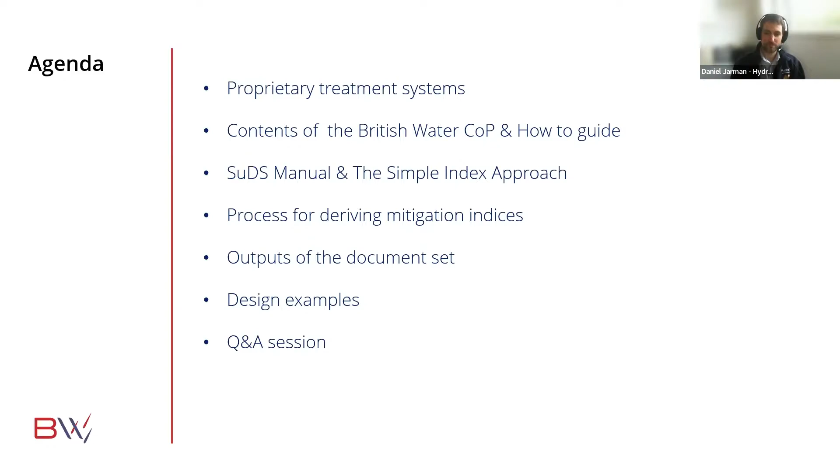Proprietary treatment systems were originally heavily categorized as anything subsurface or piped. But there are more hybrid and surface-based systems now that blur the line between subsurface and surface zones. Typically surface systems are favored, but subsurface systems can be preferable where they meet additional design constraints related to health, safety, or space, and allow developments to meet other SuDS design objectives such as amenity, biodiversity, and quantity control.

Those processes include screening out larger debris, settling out dense particulate material, flotation of free phase oils or trash, filtration of smaller or more neutrally buoyant particles, sorption of dissolved pollutants like heavy metals or nutrients, and for some of the more surface-based systems, bioremediation and biotransformation, where microorganisms or biological processes lock up pollutants or transform them into a more stable form with less damaging long-term impact.

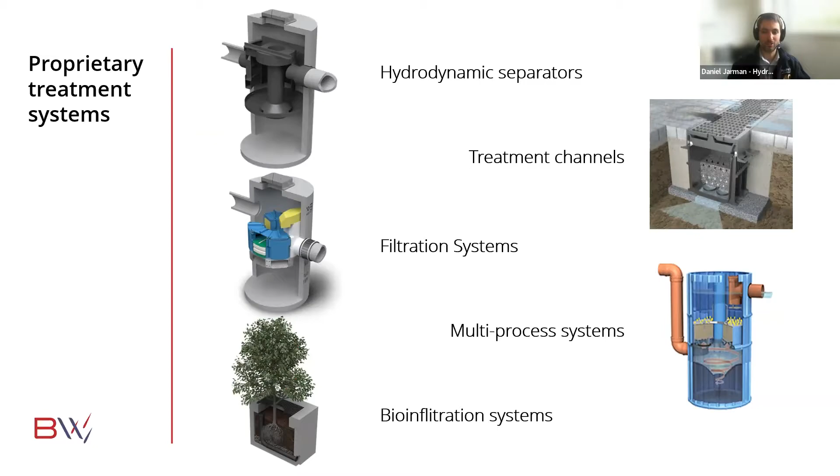The main issue we're addressing with both documents is arriving at a full set of pollution mitigation indices for use in the simple index approach. We'll get into more detail as we go through the slide set.

The first document, the COP, is a voluntary lab test protocol to generate supporting data for deriving mitigation indices for proprietary treatment devices. The tests in that code of practice are based on elements of the US New Jersey Department of Environmental Protection and German DIBT test protocols, but adapted to make them relevant to UK conditions.

We started with the DIBT and NJDEP test protocols because they're well recognized, already scientifically justified, and there are already devices in the UK or marketed in the UK with these approvals. So we had to recognize these protocols are already present, but also needed to adapt them to make them robust for the UK.

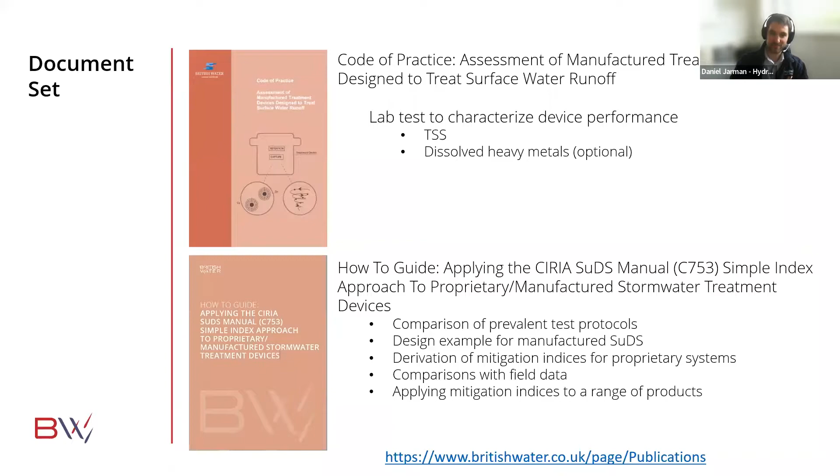So I would hope everyone is aware of what the SuDS manual is. I'm sure they are, but for those of you wondering what mitigation indices are and why you should care, we'll do a quick skip through the SuDS manual and the SIA, or the simple index approach, design process.

The SuDS manual is a very comprehensive guidance document published by CIRIA. The underpinning philosophy is that there are four main pillars which are pivotal to the design of any SuDS scheme: water quantity, water quality, amenity, and biodiversity. The SuDS manual contains many answers and has good supporting information where available, and although it's a guidance document, many of the design processes have been adopted into local planning requirements, so you're seeing this guidance become mandatory.

The only downside is it's a bit of a doorstop of a document, 1,000 pages long, so we are going to restrict our focus right down to design principles for water quality today, and then down again just to the simple index approach.

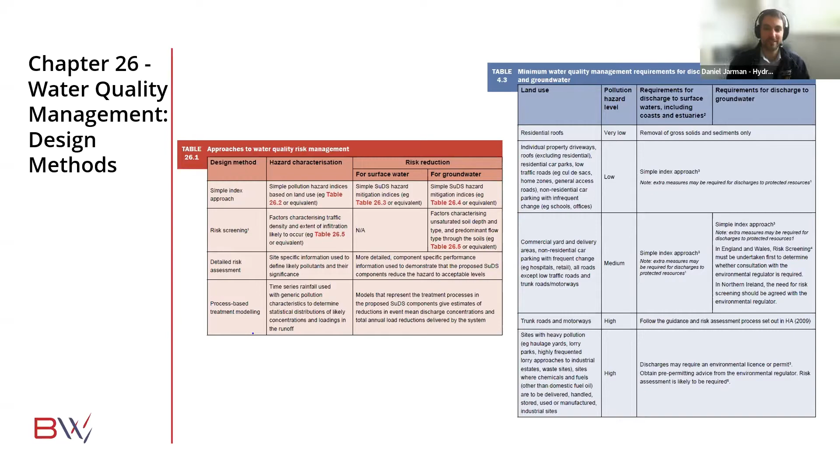The SIA design process is a source pathway receptor approach. It quantifies the hazard a particular site or source presents, and requires that the pollutant pathway present mechanisms to get your hazard level down to an acceptable level before it reaches the receiving water body, which is the receptor.

Now, in the SIA process, 3 pollutants are essentially analyzed, which are TSS, heavy metals, and hydrocarbons. A value named the pollutant mitigation index is used to select SuDS components that reduce hazards to an acceptable level.

So I've run through a quick example of this. Step 1 is to allocate... sorry, I'm aware there's text coming up. We'll come to the questions at the end.

Step 1 is to allocate a suitable pollution hazard index for the proposed land use. If we take, say, a typical residential development, which is considered low risk, you get pollution hazard indices of 0.5, 0.4, and 0.4 for TSS, metals, and hydrocarbons, respectively.

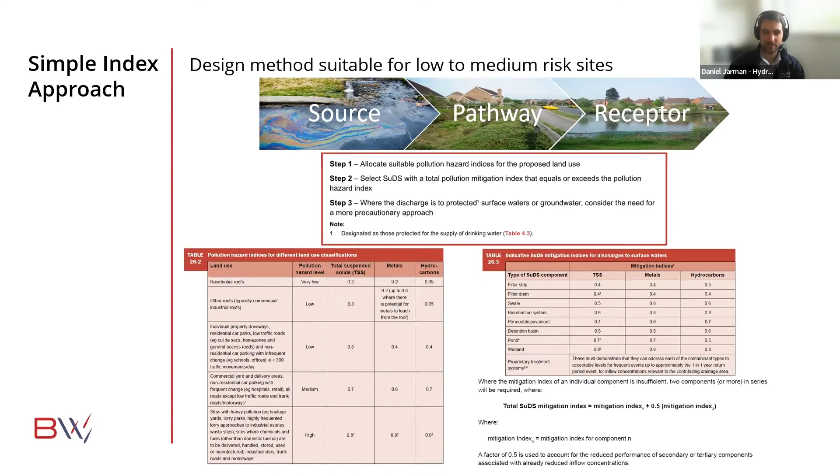I'll quickly just touch on where those mitigation indices for the green or natural systems come from, because it's relevant to understanding what we're trying to achieve for the proprietary systems.

So the mitigation indices are an indicator of average annual load reduction of a particular pollutant. They've been derived from a project called the US BMP database, or the Best Management Practice database, and that's recently been retitled the International Stormwater BMP database. This project monitored over 700 different sites throughout the US to establish the efficiency of different SuDS components.

A summary of the findings is presented in table 26.13 in the SuDS manual, which is kind of hidden away in an appendix. But we don't need to go into this in too much detail, but I'll quickly give an example of how it maps over to the mitigation indices.

So if you take a detention basin as an example from the BMP database, you've got an interquartile range for TSS at the inlet and outlet of, well, at the inlet it's 20 to 114 milligrams a litre, and at the outlet it's 10 to 47 milligrams a litre. So you're getting around about a 50% reduction in the pollutant load, and you see that reflected in the mitigation index, which is 0.5. So I hope that gives a bit of traceability to where those numbers come from.

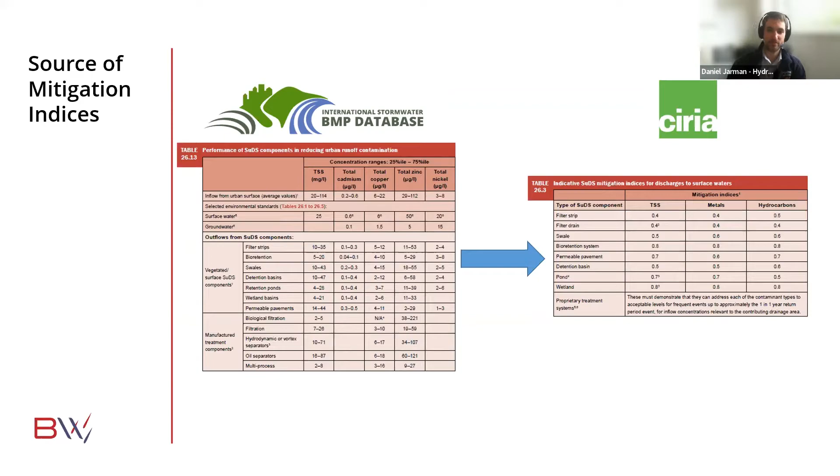And jumping to take a more detailed look at that requirement, at the end of table 26.3, it lays out the requirements for proprietary treatment systems, which is they must demonstrate they can address each of the contaminant types to acceptable levels for frequent events up to approximately the 1 in 1 year return period event for inflow concentrations relevant to the contributing drainage area, which is a bit of a mouthful, but what it's essentially putting the responsibility on the manufacturers for is to quantify and demonstrate the annual pollutant inflow and removal rates for TSS, heavy metals, and hydrocarbons, and that's under treatment flow rates up to the 1 in 1 year event.

Now, broadly speaking, this gives mitigation indices that are equivalent to those presented and derived from the US BMP database. The British Water Group has been working towards a standardized and robust approach for the testing and derivation of mitigation indices that is in accordance with this requirement of the SuDS manual. And this is what we've arrived at with the COP and how-to guide.

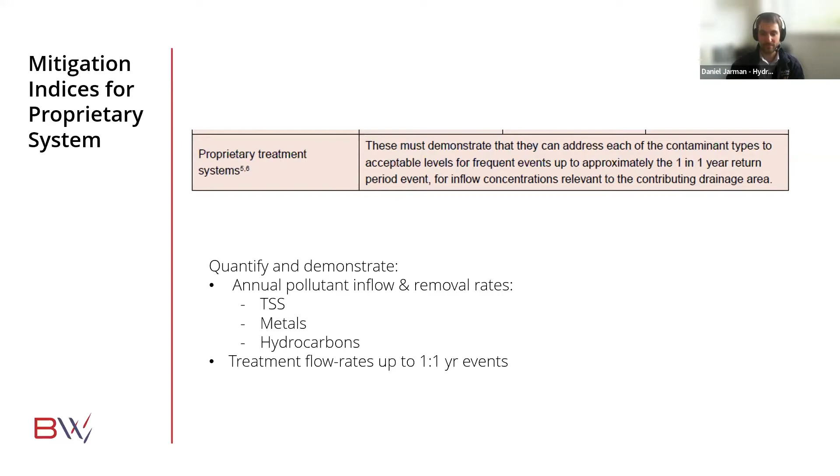TSS retention is tested at full scale, and the dissolved metals retention is tested at down to a 1% scale sample of the filter media.

Now, the reason dissolved metals isn't tested at full scale is because we're trying to avoid labs having to deal with a large amount of contaminated water and disposal of that.

Hydrocarbons is not covered in the Code of Practice. As I mentioned before, if there's a significant risk of hydrocarbon spill, designers should be referring to PPG3 and using EN 858 certified systems.

However, for the low and medium risk scenarios that SuDS is appropriate for, there is information in the how-to guide to derive mitigation indices.

What you can see from the test setups is, despite the scale, the testing looks relatively familiar. We're controlling the flow rates and inflow concentrations, and we're measuring the output concentrations to determine the pollutant load reduction.

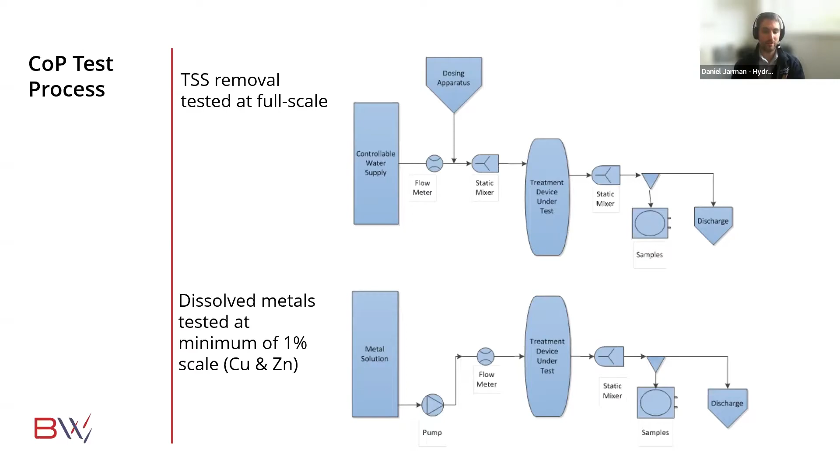Now, I mentioned we're controlling the flow rates. Of course, flow rate is one of the most detailed aspects where we've placed effort in developing the Code of Practice and the how-to guide.

Because it dictates the size and obviously the cost of the system. Broadly speaking, pollutants and sediments or sediment distributions don't vary much between Western cities with temperate climates.

What does vary is the rainfall distributions. So we've had to do a bit of analysis there to make sure that the design protocols and the test flow rates are representative for the UK.

So we took EA rain gauge data from 8 cities and processed that to determine rainfall volume contributions related to rainfall intensity. And what we found is, while there's a little bit of variation, you can use a single set of flow rates for the design and for the testing.

And there's very, very little difference in the peak annual flow rate across England. This analysis was carried out by HR Wallingford and Cranfield University.

As manufacturers and designers, the number we're most interested in is that peak treatment flow rate, or the treatment flow rate the device must be able to handle, because that dictates more or less the overall size and cost of the system. In this case, the magic number is 27 millimeters an hour in terms of rainfall, because that accounts for 99% of all rainfall volume.

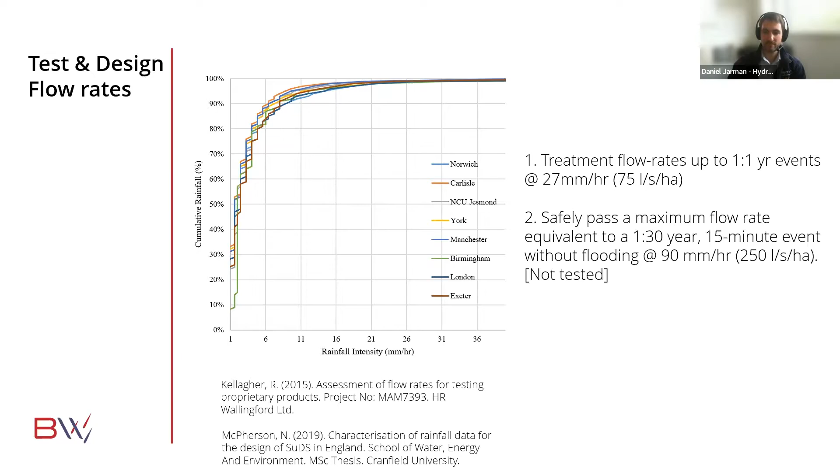So moving on, how the test data feeds into the how-to guide. Now, the how-to guide gives procedures for determining mitigation indices from multiple recognized SuDS assessment protocols.

So it can accept data from the British Water Code of Practice, the New Jersey test protocol, and the DIBT test protocols, but none of the tests give you a complete set of mitigation indices, which is a little bit unfortunate.

The how-to guide fills that gap by giving the procedures for deriving the missing components.

So taking the route of the Code of Practice as an example, the Code of Practice only covers testing for quantifying annual load reduction of TSS and dissolved heavy metals. Hydrocarbons and the solid phase of heavy metals is not tested.

So the how-to guide then explains how to populate these values to arrive at a full set of mitigation indices, so you can design for those low or medium risk sites.

Now, there's no pass or fail in the process. It allows manufacturers to essentially declare and design to any mitigation index or indices they deem fit. And that gives a great deal of flexibility to both designers and manufacturers in this process.

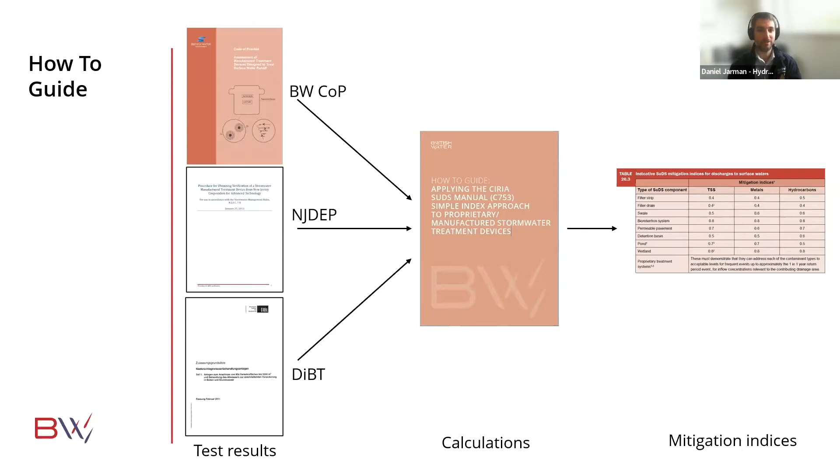So the outputs of that process are three documents. The first is a test report, either from the British Water Code of Practice, New Jersey, or DIBT, and this will be signed off by the test house that performed the testing. So you've got some quality control and reassurance there, but that's only for a single unit size. You only test one device.

The second document is a declaration by the manufacturer of their SIA mitigation indices, derived from the how-to guide, and also how those mitigation indices are mapped to different unit sizes and the flow capacities that can be handled by various sizes in a product range.

And the third document we're recommending is an independent verification statement. Effectively, this is a desk check to ensure the mitigation indices and flow rates have been derived correctly from the test data and the how-to guide. This should be signed off essentially by an independent consultant or appropriate approver in the field.

We've taken this route with British Water because they are not a certifier and they're not a regulator, so there's no real certification process here. But completion of this set of documents will allow manufacturers to demonstrate that their published mitigation indices are appropriately evidenced and derived in accordance with the requirements of the SuDS manual. And that immediately maps over to any planning constraints that have made it from the SuDS manual into local planning requirements.

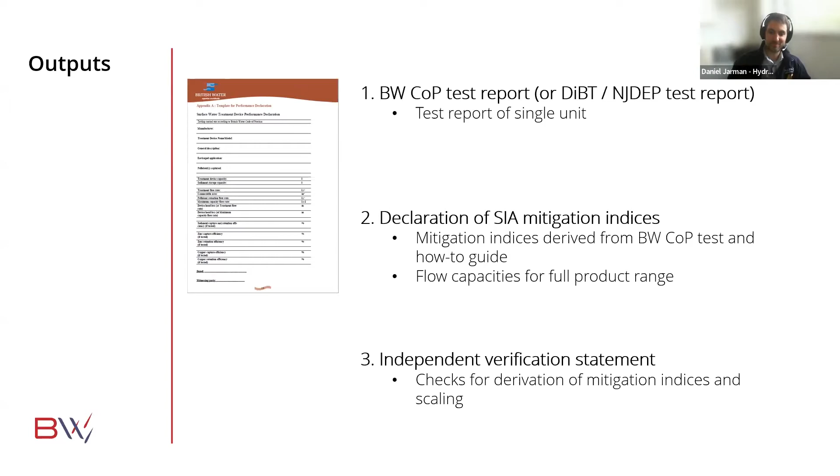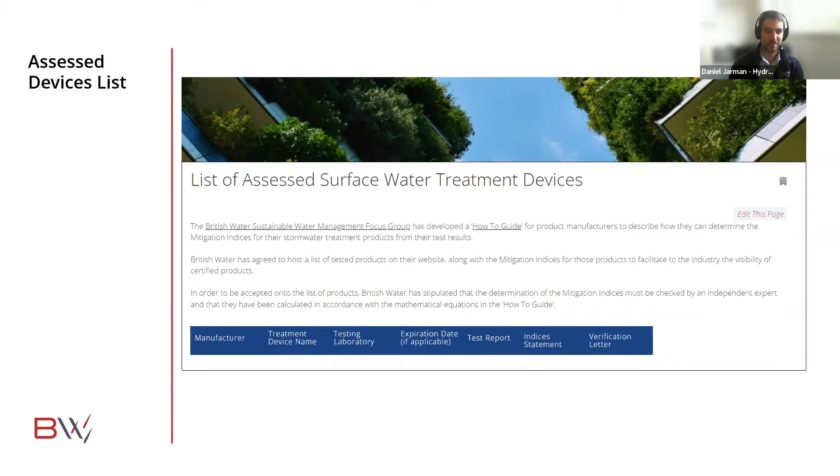So British Water are in the process of setting up a website to house these output documents. This is purely going to be a repository for supporting information, for manufacturers to upload and designers to view the documents. You don't need to be a British Water member to use this site. You can see the headings for the columns there, but the last three columns are those documents we talked about on the previous slide: the test report, the declaration of the indices, and the independent verification letter.

And then finally, we've also set up a clarification site. In acknowledgement that no test process or guidance is perfect, as questions come through or are addressed to the group, we'll make sure those are fully transparent. Any confusions or loopholes are addressed, and we document them here. As we populate the site, it will give a reason to revise and update the documents at a later date.

So far there's been a couple of questions related to sand grades and sample containers, but nothing that dramatic. And with that, I will hand over to Joe for a few design examples.

Thanks, Dan. Can you stop sharing and then I shall? I'm just trying to find the button. There we go, pick up the gauntlet. There we go, thank you very much.

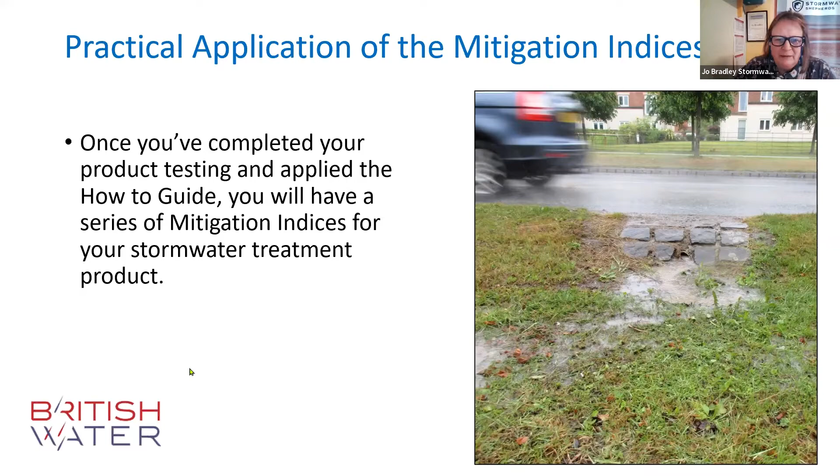That's it. Big shout out for the SuDS manual. Don't forget that this whole process sits within the umbrella of the SuDS manual. And you must remember, as you drift into using manufactured products as part of your SuDS management train, you must also remember that these things are essential: master planning, the maximisation of use of surface features, and interception. So don't be distracted, don't disappear down a manufactured device wormhole, as I often do, and forget about the primary principles of the SuDS manual.

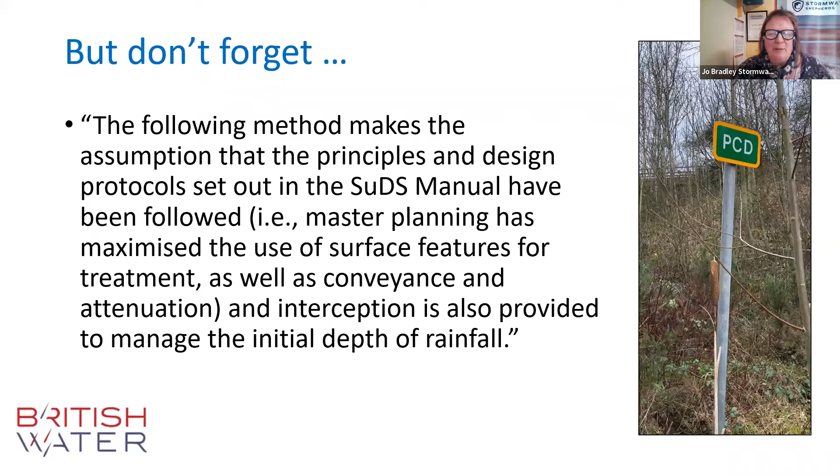So just a couple of examples of how we use mitigation indices and hazard indices in order to do the simple index approach. This is a swale in Chorley. It's become famous because I use pictures of it all the time. And you'll see on that little chart in the left-hand column the mitigation indices for a swale that are provided in table 26.3 of the SuDS manual.

So you know how much treatment and mitigation that swale can offer. Is it good enough for low and medium risk sites? In the next column, you've got the pollution hazard indices for a low risk site: 0.5, 0.4, 0.4. And you can see that a swale on its own is adequate to deliver the pollution treatment you need for that low risk site.

For a medium risk site, however, with a pollution hazard index of 0.7, 0.6, 0.7, that swale on its own isn't good enough. So you'd start to need to design a SuDS management train, either including that swale or trying to choose different solutions.

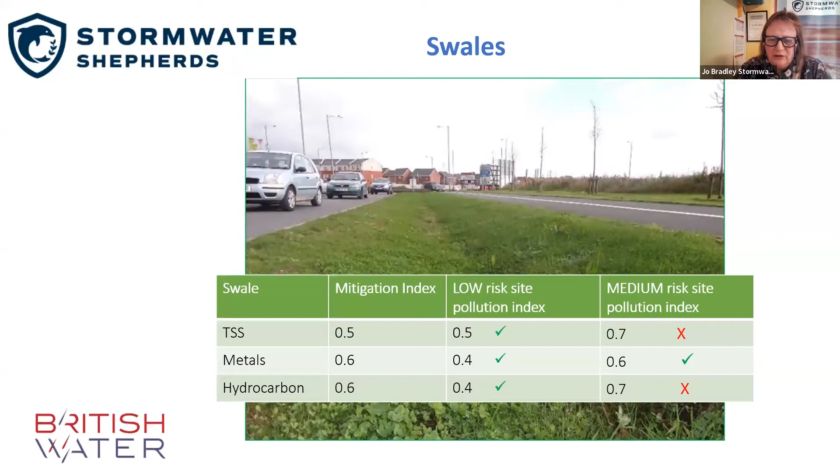Same process for a pond. The mitigation indices from table 26.3 for a pond are 0.7, 0.7, 0.5. For a low risk site with those pollution hazard indices, that pond on its own offers enough water quality treatment. For a medium risk site, however, there's a gap, and you'd need to address that gap by introducing more treatment for hydrocarbons.

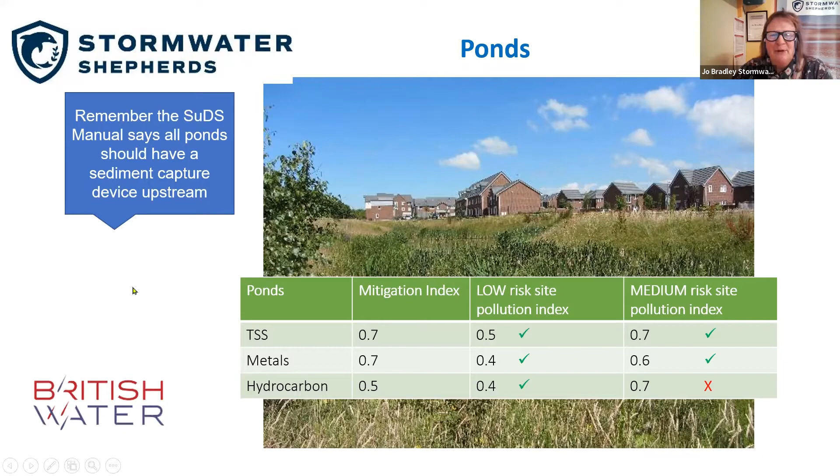However, the SuDS manual says all ponds should have a sediment capture device upstream. So if you design your SuDS management train well with a sediment capture device and a pond, you can satisfy the requirements of the simple index approach very easily.

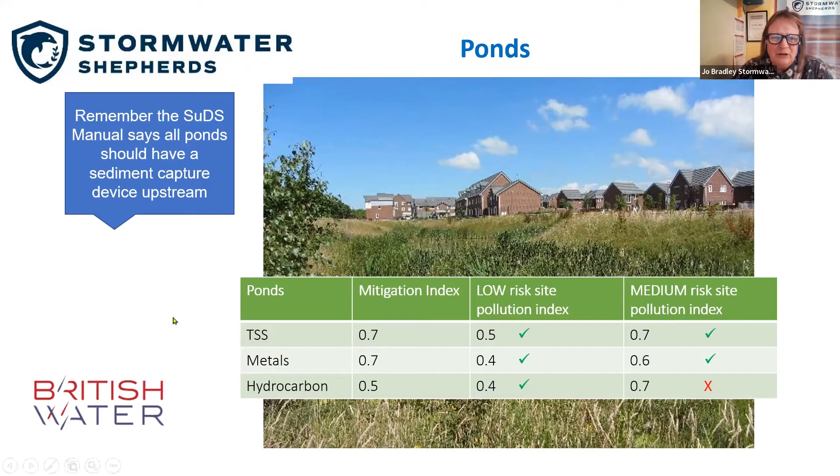For a vortex grit separator, this is a manufactured treatment device. So we're going to start looking now at what we're talking about more specifically this morning. The mitigation indices are provided by the manufacturer, as we've just described, and Dan's just gone through the process. So the mitigation indices in that first column might be given to you by the manufacturer as 0.5, 0.5, 0.7.

So again, for a low risk site, those pollution mitigation indices are adequate to satisfy the simple index approach. You could just install that vortex grit separator and it will deliver all your water quality treatment requirements for that SuDS management train. For a medium risk site, however, it doesn't satisfy the requirements of TSS and metals, so again you'd have to incorporate it as part of a SuDS management train.

So you ask the manufacturer to provide the mitigation indices. You check on the British Water website going forward to make sure those mitigation indices are on the British Water website and you know they have been derived properly. Then you can comfortably and confidently use these devices as part of your SuDS management train.

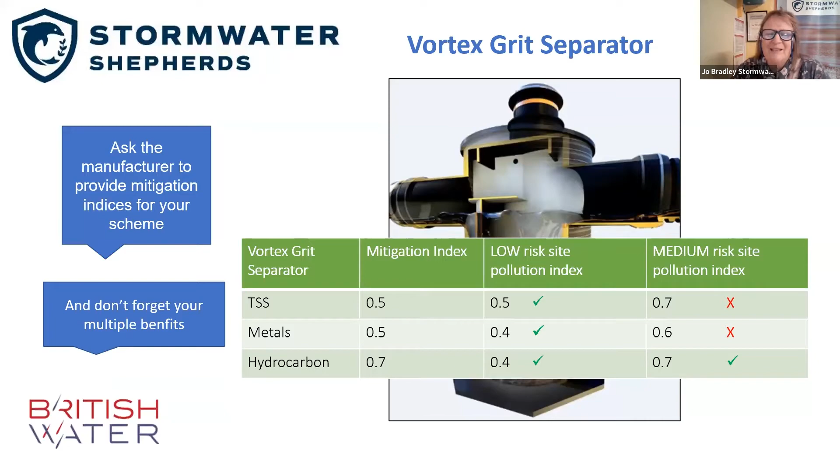Remember though, and this is what I'm saying about not disappearing down a manufactured device wormhole - that seems simple, doesn't it? That device delivers all your water quality treatment requirements for a low risk site in accordance with the simple index approach. But you must also deliver the other benefits of a SuDS management train. So the water must then go on into a vegetative device to deliver amenity, biodiversity, and obviously the hydraulic control for the water off site. You need to incorporate these devices as part of a SuDS management train.

This is a famous and long-standing illustration of a SuDS management train that I like. This is a vortex grit separator feeding into a pond. So you take the mitigation indices of your vortex grit separator from the manufacturer, and then you have half the mitigation indices of the pond, as Dan described earlier, and you work that out as your SuDS management train and decide if that satisfies the pollution hazard indices for your site.

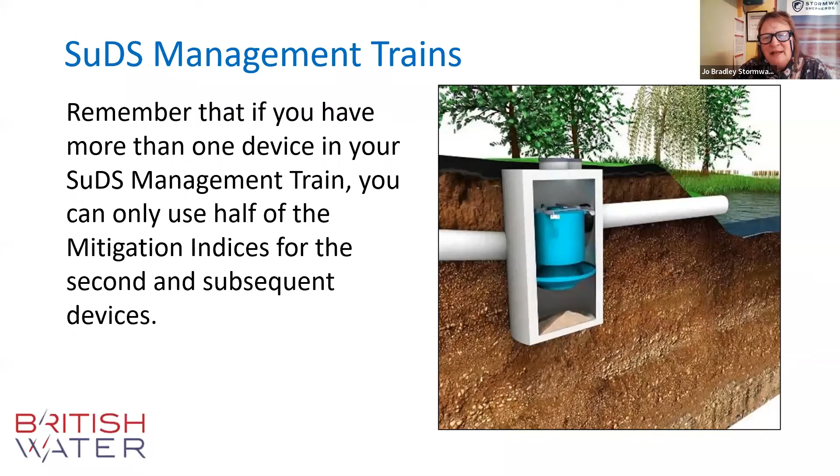Now, for a low-risk site, that's perfect. You're delivering sediment control, pollution control, attenuation, biodiversity and amenity. That's a very sensible solution. But for a high-risk site, there's more detail to work out before you can go forward.

The most important thing to think about is treatment flow rates. And this keeps me awake at night and has done for some years. All devices, vegetative devices and manufactured devices, have a treatment flow rate - the amount of water they can treat in a period of time - and a hydraulic flow rate - the amount of water they can convey forward as a maximum capability. The two things are usually different.

Usually a device will treat a certain volume of water or a certain flow rate, but it will convey more water or a greater flow rate. You need to understand the difference between those two in your design and make sure you are delivering enough treatment for your flow rate. So a pond, for example, might be able to cope with really high flows in a major rain event, but you need to understand what your treatment volume is using the calculation in the SuDS manual and check that you have enough treatment volume as well as enough hydraulic volume.

I see quite a lot of end-of-pipe ponds that make me wince a bit. Although the calculations for the hydraulics have been worked out, I'm not convinced there's enough time for the water to rest in that pond, for sedimentation to take place, for the plants to take up nutrients, for the sunshine to break down organic pollutants. You need to understand what you're asking that pond to do, and is it big enough? Those are the calculations that are important.

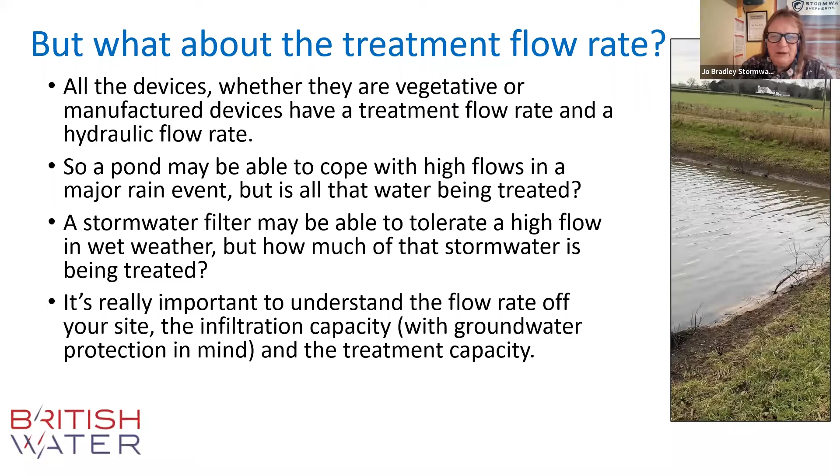So how much storm must you treat? Dan's already told us that we need to treat 75 litres per second per hectare, depending on the runoff coefficient. That's a 1 in 1 year, 15-minute storm event. If you treat that, that's most of the pollution load coming off that catchment in a year. But a few times a year, more so in Lancashire perhaps, it rains harder than that.

You need to understand what you're going to do with that excess water. Are you going to treat it? Are you going to convey it through your device? Are you going to attenuate it, or are you going to bypass it? You need to work out what decision you make there and what impact that will have on your treatment.

Very important for some of the pollutants. Phosphates get washed out easily. So if you've got a pond for phosphate treatment and you put a whooshy flow through for a 1 in 30 storm event, you may take all the phosphate with you and you've negated any benefit. So understand your pollutants, understand your pollutant capture processes, and understand the impact of flow on those.

As I mentioned a minute ago, some treatment devices work really, really well. Some of the filters can catch above 90% of the metals they're capturing. So you only need to treat a small part of the flow to reduce the pollutant load. If you remember Dan's graph of rainfall events, up to 10 millimetres is a huge proportion of the rainfall events in the UK in any one year. So if you treat that to a very high standard, that may reduce the annual load of pollutant enough to protect the environment.

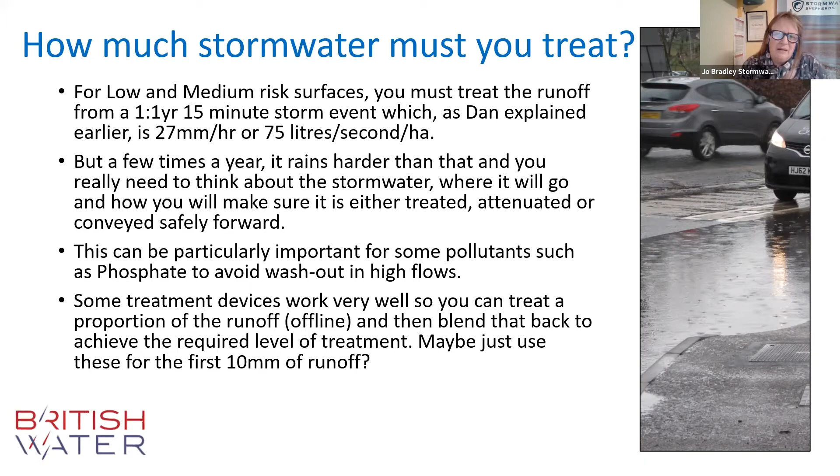So we're starting to talk now about bypassing and also blending - treating some water incredibly well and then blending it back with the rest of the stormwater to deliver a pollutant load reduction. These calculations are starting to be more complex and perhaps apply to high-risk surfaces as well.

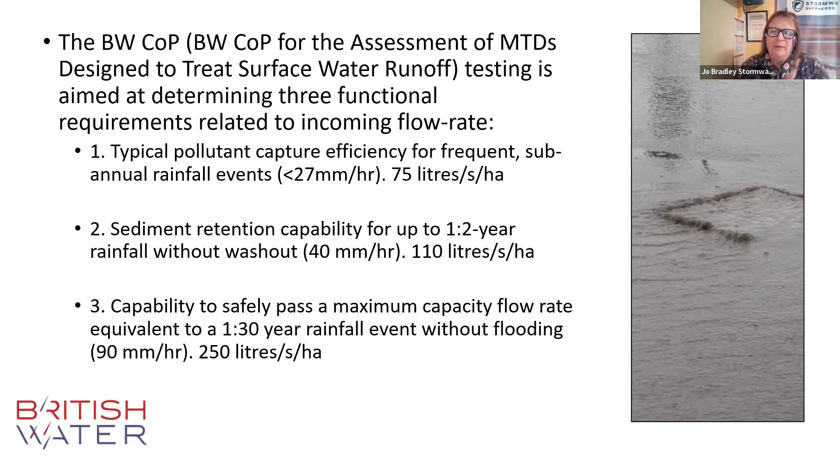So the British Water Code of Practice, the test protocol that Dan described earlier, describes how you must treat the 1 in 1 year storm event, 27 millimetres per hour. But you must also check in your test protocol that if you put 40 millimetres per hour through your device, you don't whoosh all the pollutant out. You also need to understand if your device can safely convey a 1 in 30 rainfall event, so 90 millimetres per hour, or if that flow will have to be bypassed around the device.

A couple of examples here - please don't bite my head off. These numbers are not explicitly applicable to these devices that I've illustrated; I've just used them for illustrative purposes. But these are some ideas of what you might consider for a treatment train, particularly for maybe a high-risk surface. So you might start with a vortex grit separator, and again, I've indicated here that these are sized.

So there is a full range of sizes of these devices, and the flow rates I've illustrated may represent just one size. A lot of them go a lot bigger than this.

So your vortex grit separator might deliver 0.5 TSS, 0.5 metals, and 0.7 hydrocarbons for your mitigation indices. It might tolerate 91 litres per second as a treatment flow rate, and it may convey all your flow forward through the internal bypass mechanism.

Downstream of that, you may have a stormwater filter because you may have a particular problem with dissolved metals, for example, and that will give you mitigation indices of 0.8 for TSS, 0.8 for metals, and 0.7 for hydrocarbons. But you can only use half of those mitigation indices because it's a downstream device.

Now, you may have put there that the treatment flow rate may be good, so it may be 85 litres per second, depending on what size device you select, and it may be able to convey all the flow through it. But ask yourself if the filter is going to be okay with that massive flow through, or whether you might want to consider putting it offline. It kind of depends on the choice of filter that you make.

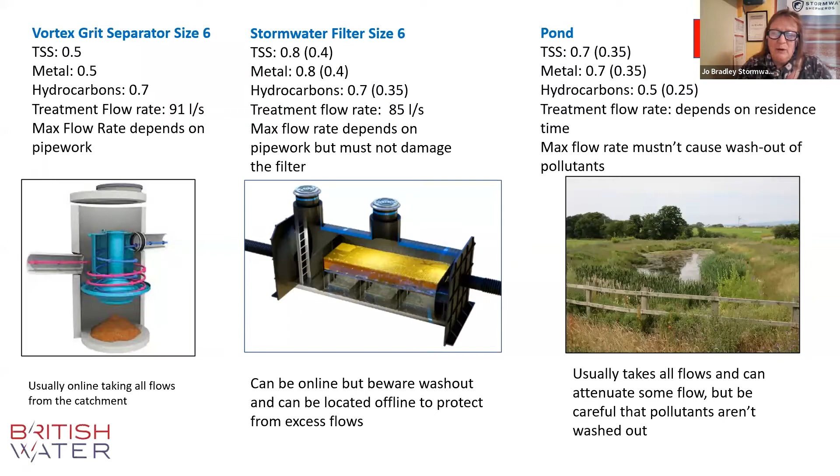So you can see how we're starting to design SuDS management trains using a combination of manufactured treatment devices and vegetative treatment devices. You need to understand how much flow you can put through those devices and get sensible treatment. A couple of other examples, and again, numbers for illustration only.

You might choose, if you've got an oil spill risk on site—so if your site is a high risk site with an oil spill risk, or indeed a medium risk site with an oil spill risk—you may either want to or have to put in an oil water separator, and this is a bypass oil water separator. So it might treat 15 litres per second for a small sized one, giving you good mitigation indices of 0.8, 0.6, 0.9.

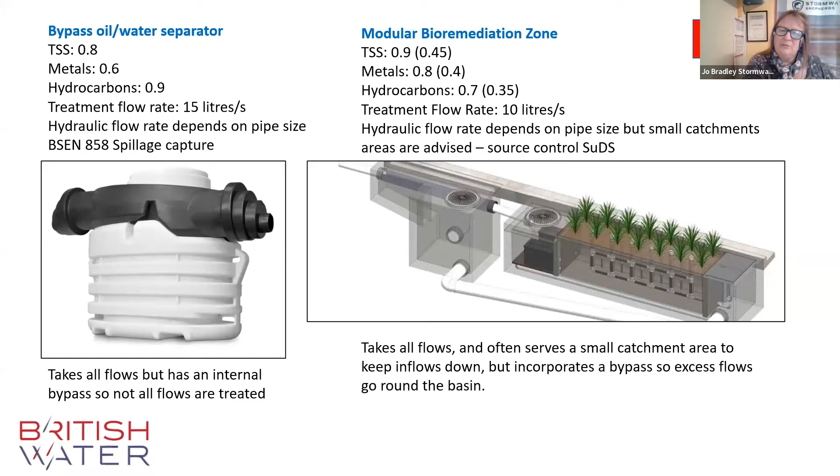And then downstream, you might have something like a modular bioremediation zone. These are good because they only take quite a small flow rate, so treatment flow rate of 10 litres per second per unit, but you can have lots of units distributed across maybe a residential or commercial development, which is representative of the source control SuDS that the SuDS manual prefers. So you break your catchment down into smaller catchments and have devices for each of the smaller catchments.

And then for high-risk surfaces, which is where I spend most of my time working, please remember that it's not just the simple index approach. You must do a full risk assessment for your development. You can incorporate the simple index approach into it to do those calculations we've just described. That's fine, but you must also think about spillage risk.

Do you need a bypass oil water separator or a full retention oil water separator or some other spillage control mechanism? Fire water risk—what happens if your factory burns down? Where does all the fire water go? Do you have chemicals on site? Do you need closure devices on your SuDS management train in order to shut the whole thing down if there's a fire? Or do you need specialist filters?

So there are loads of filters on the market that deal with pesticides, for example, specialist pollutants. Those calculations I described earlier, where you're looking at flow rates, conveyance rates, attenuation rates, and blending, they all become more important when you're looking at high-risk sites.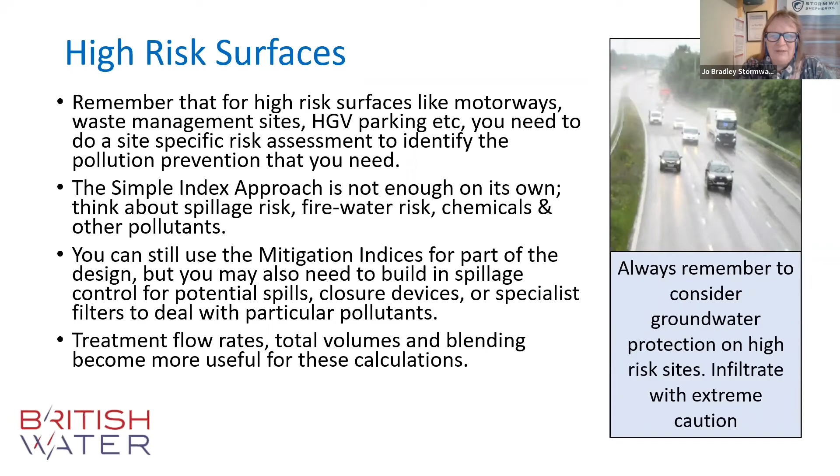Please remember groundwater protection—I do try and say that as often as I can. It's really, really important. Where you put them matters. If you've got a sediment removal device, it needs to be at the top of the catchment because the sediment will settle out as soon as it can. So as soon as your water rests, the sediments settle out. Put that at the top of your catchment, because then your downstream devices can work better.

Filters usually go downstream because they need the sediment to be gone first, or they get blocked. So it's a sediment device, and then a filter.

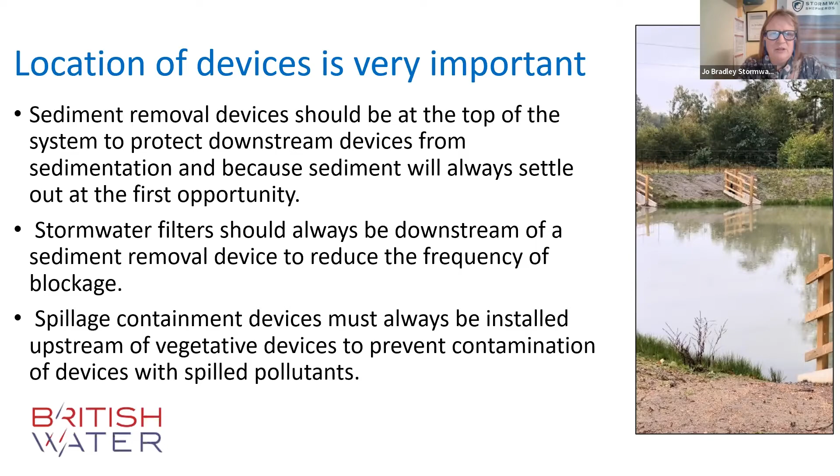And obviously spillage containment devices, so separators, closure devices, you need to put them in the right place so that they will capture the spillage and also control any discharge off site in the event of an emergency. And last but not least, maintenance, maintenance, maintenance. Don't put all these beautiful devices into your SuDS management train and then not maintain them.

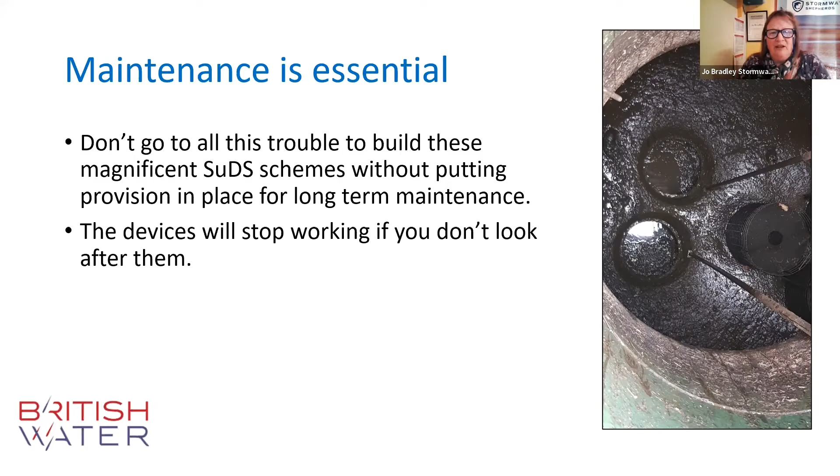This is, thanks to Paddy who's on the call for this photograph, an oil water separator that has effectively captured that nasty, gungy, toxic sediment, which is what it's designed to do, but you must empty it or it stops working after 5-10 years. The same with all devices. They all have a period of time in which they'll work and then they stop working. You must maintain them.

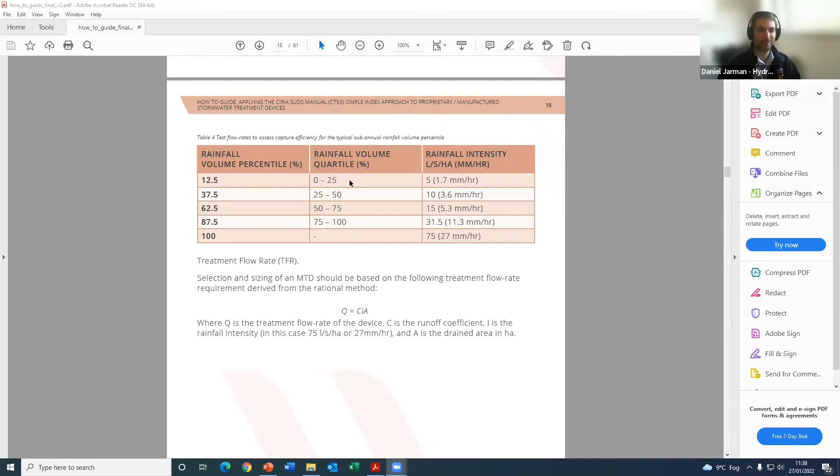Yes, the flow rates are derived from the centroids of the quartiles of volume of rain falling at different intensities in the UK. The graph's a bit easier to follow—if you look at all of your rainfall volume falling over a given year, this is the typical distribution you get against your rainfall intensity.

27 millimeters an hour represents your annual peak, so you're designing your unit to accommodate that 27 millimeters an hour. It always has to accommodate that. But the test flow rates aren't carried out at the peak. They're carried out at the mid of the 0 to 25, the mid of the 25 to 50, the mid of the 50 to 75, and the mid of the 75 to 100. So you're testing at a flow rate that represents that block of volume of rainfall falling in the year.

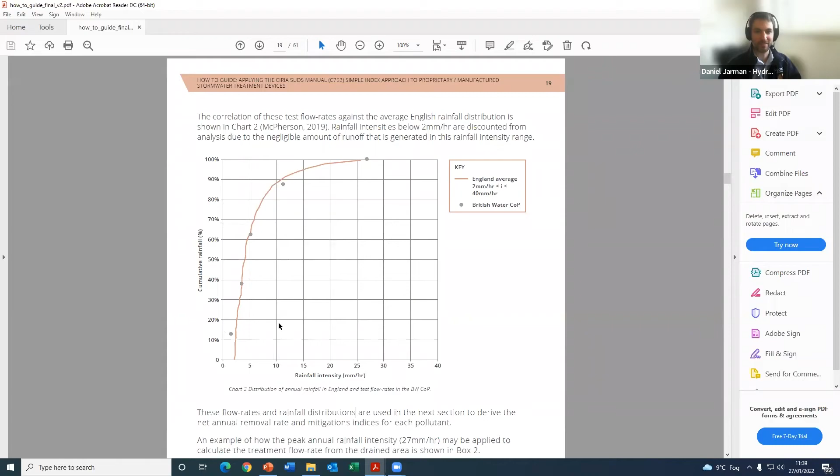And that's how you get back to a table that looks like this. So you've got 5 litres a second per hectare, 10 litres a second per hectare, 15 litres up to 75, but these are the percentiles. So you test at the 12.5 percentile, you test at the 37.5 percentile, you test at 87, but your unit design flow rate is based on that 75.

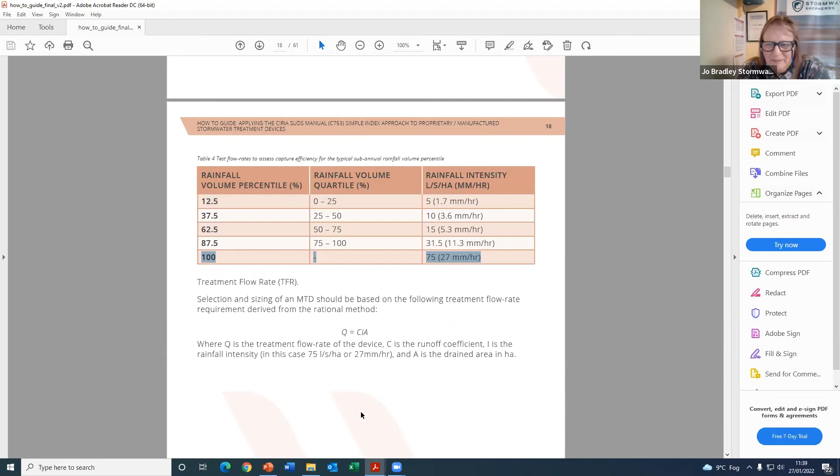That makes sense, Sam. Do you want to unmute and tell us if you want to ask any more? Can they unmute? Maybe. Oh, I can try. Can you hear me? Yes.

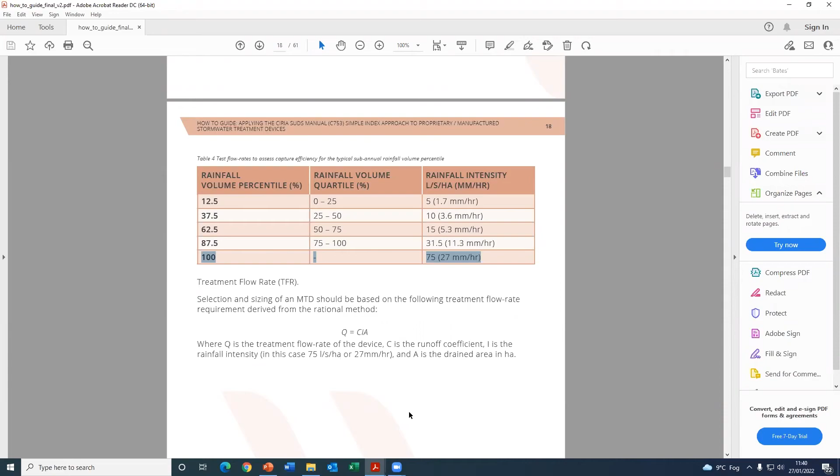My question was just in terms of mitigation indices, because if you have 27 millimeters per hour and you're applying directly from the code of practice, what removal efficiency would this 27 millimeter an hour get if it's kind of cumulative over a year?

So the treatment efficiency is related to the flow rate, but you would test one single device. Let's say I test a device that can do 75 liters a second, and that means I would test the device at these 4 flow rates. I would then add up the efficiencies, the removal rates it got at those flow rates, and average them. That gives you your average annual efficiency, which is what the mitigation index represents. So that's how you arrive at the removal rate.

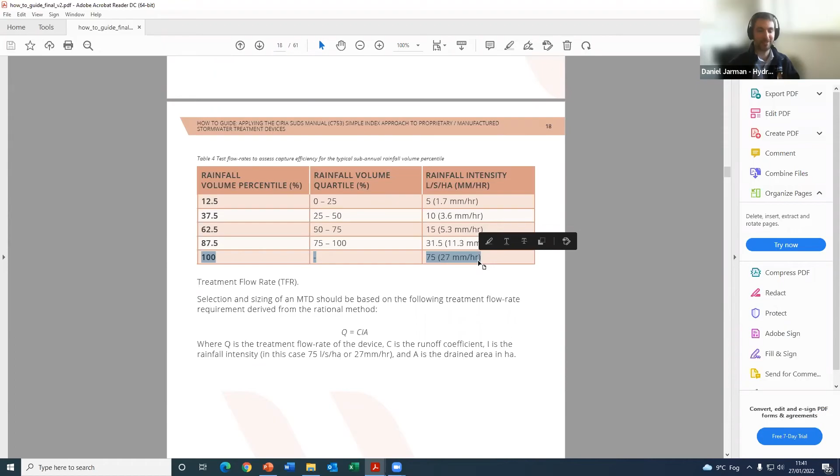So I would have then assessed a unit that can do 75 liters a second with a given mitigation index. But that's only testing one device, so you then have to map that to a larger or smaller unit size. That is explained further down in the guide somewhere. So there is scaling.

If you are scaling settling, you're aiming to maintain similar velocities within the system. So if you do twice the diameter, that gives you 4 times the area, and you can have 4 times the flow rate. So let's say your 75 liters a second unit was 1 meter in diameter. The next one up, 2 meters in diameter, would get you to 300 liters a second. Is that right? Yeah, that's right.

Does that answer the question, Sam? You've got the efficiencies, but then you've got how you map the flow rate to different sizes of unit.

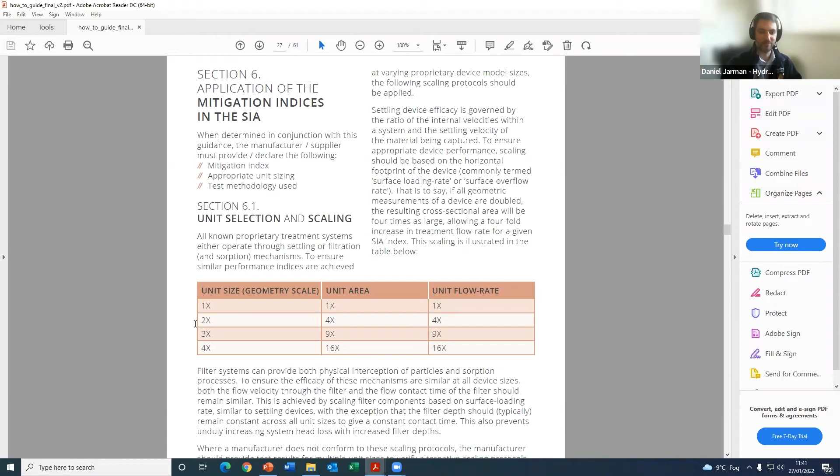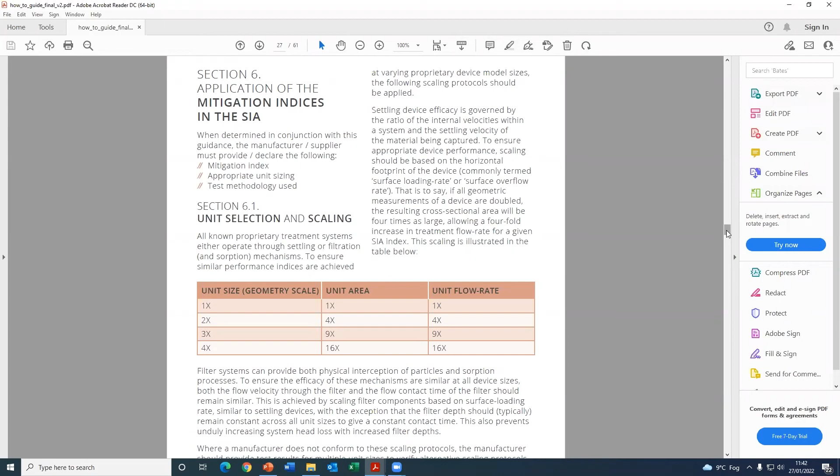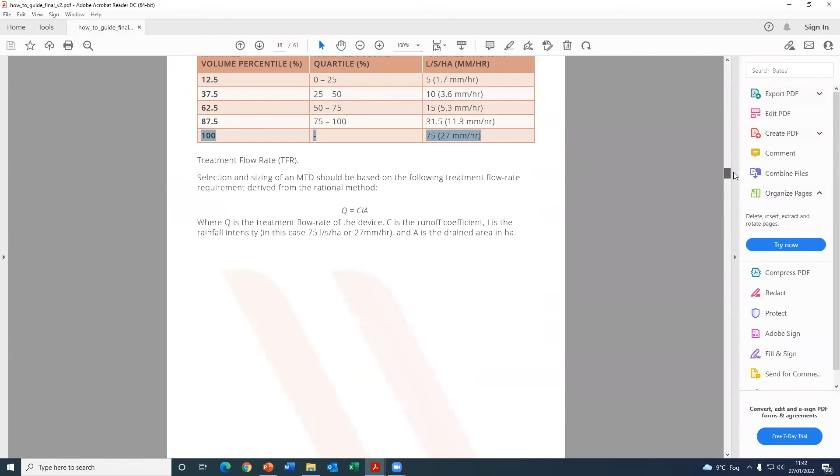Yeah, I'm only confused because in the code of practice, it's a connected area to a device, and rainfall intensities are converted to flow rates. Those flow rates are tested, and you get an efficiency. So if you tested a device for, say, 500 meters squared, you wouldn't have a value for that 27 millimeters per hour under the how-to guide. So would you have to then go up a size in your product range to match in the how-to? So a 500 meters squared tested device wouldn't be 500 meters squared in the how-to guide?

Yeah, they are, sorry Sam. The test flow rates sit in those quartiles, in the middle of the quartiles, and those, once they're added together, represent a unit which is capable of doing 75 liters per second per hectare. So you've got that value there, which is then used in the how-to guide.

Okay, yeah, so if you said a drained area of 500 meters squared, is that what you're talking about? You wanted to derive a flow rate from 500 meters squared? Yeah, I was just wondering if 500 meters squared is directly transferable without having to figure out any other flow rates.

Oh, if it can do, obviously, if it can do above the required treatment area or the drained area, then there's no issue. So if your device can do 700 square meters and you plug in 500, there's no concern. But if you plug in 700 to a device that can only do 500 square meters, then you've overloaded that system and you're not going to get your mitigation indices.

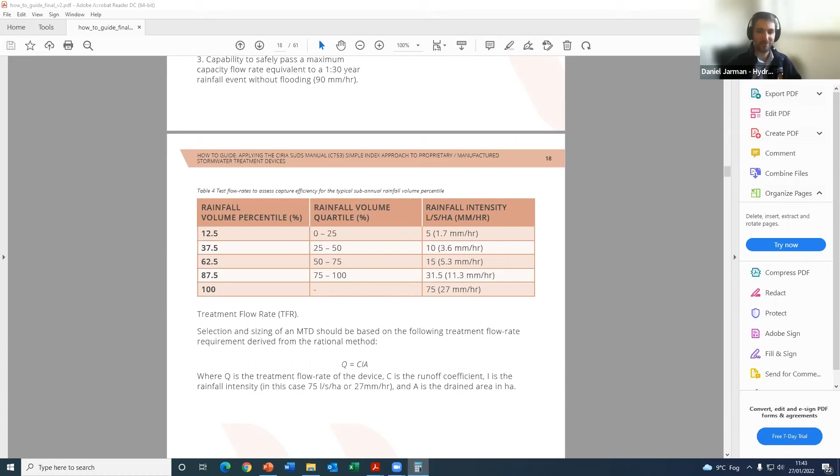I feel like we're confusing Sam more than answering the question. Possibly, it's those quartiles. It is really difficult to get your head around that if something's tested to 11.3 millimeters per hour, how do you know it still works at 27 millimeters per hour? And it is tricky to understand.

I know it's to do with pollutant load and mass loading of pollutant, but if somebody's selling you something and says this can treat 75 liters per second and it will achieve mitigation index of 0.5, 0.7, 0.5, and then you do your calcs based on 27 millimeters per hour, and then you look back and go, well, this thing's only tested to 11.3 millimeters per hour. It does make it really complicated, but you just have to have faith, Sam, that graph and the quartile treatment, the quartile flow rates, mean that device will work for the whole rainfall distribution up to 27 millimeters per hour.